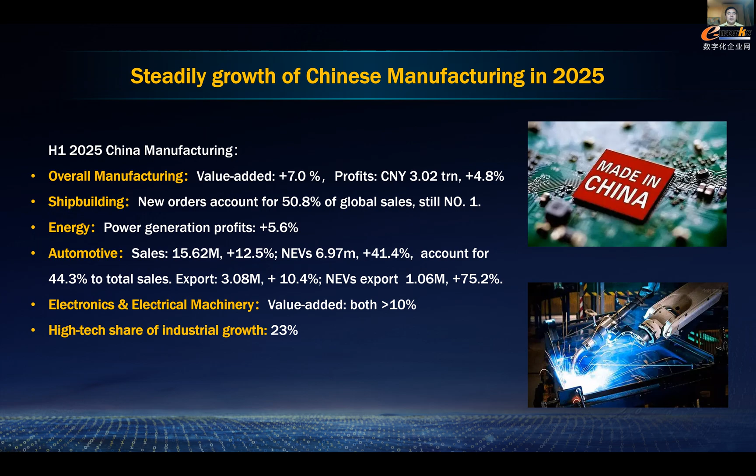Electronics and electrical machinery, the value added grew both more than 10%.

The competitive advantage of Chinese manufacturing, including the country strategy, is moving from the world factory to a global manufacturing innovation center. We have powerful government support for going from large to strong manufacturing industry. A lot of manufacturing companies in China are fast learners, good at low-cost production and export.

A lot of international companies have many manufacturing sites, R&D, and distribution centers in China, normally accounting for 10 to 30% of their global sales. China has a big domestic market.

More and more Chinese manufacturing companies are becoming international, what we normally call going overseas. We have huge and continuous investment in infrastructure, including high-speed railway, highway, and so on.

We have a complete range of industrial categories, powerful supply chain, and domestic transportation network. In China, we have abundant engineers and skilled workers. Chinese manufacturing companies are quickly promoting e-business, digital transformation, and smart manufacturing.

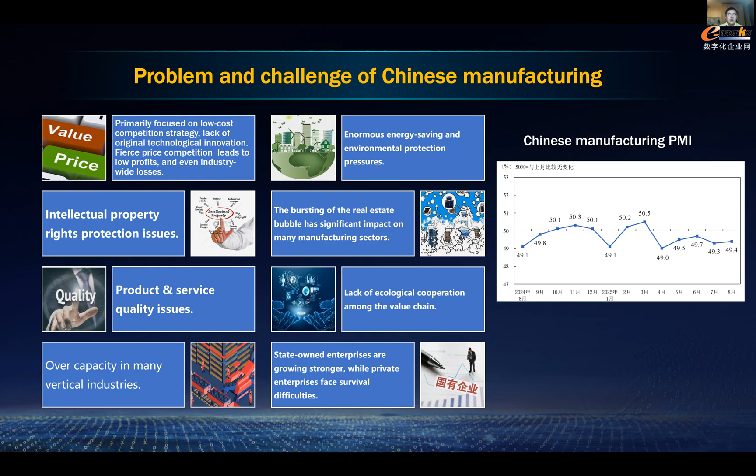In China, some big OEM companies lack ecological cooperation among the value chain. Sometimes they pay suppliers very late, sometimes even more than 1 year. In recent years, state-owned enterprises are growing stronger, while private enterprises face survival difficulties.

The megatrends of Chinese manufacturing include transformation toward high-end, intelligent, and green manufacturing; digital transformation, smart manufacturing, and AI application; globalization and improving supply chain resilience; and developing high-quality products and improving profitability.

In recent years, there are some very innovative companies in China, for example, some drone companies, some companies developing smart glasses, and commercial 3D printers. There are some very big, very fast-growing companies.

Manufacturing companies are trying to meet personalization and flexible customization, enhancing technological innovation capabilities, and increasing R&D investment. More and more companies are trying to earn money from the aftermarket, and they are trying to build ecosystems among the supply chain. ESG and decarbonization is also a hot topic in China.

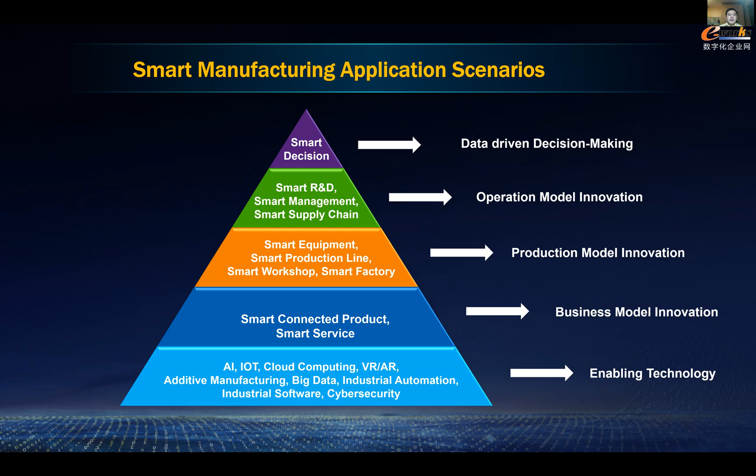In my view, there are 7 digital transformation models, including business model transformation, for example pay-per-use, and R&D model transformation, including simulation-driven design.

Production model transformation, especially realizing IT and OT convergence. Sales model transformation, including using digital sales. Service model transformation, including using AI robots to take the phone calls of customers, and using IoT and sensor data to realize predictive maintenance. Operation model transformation, using more mobile applications and even AI agents to collaborate and improve process efficiency. And finally, decision-making model transformation, using big data analysis.

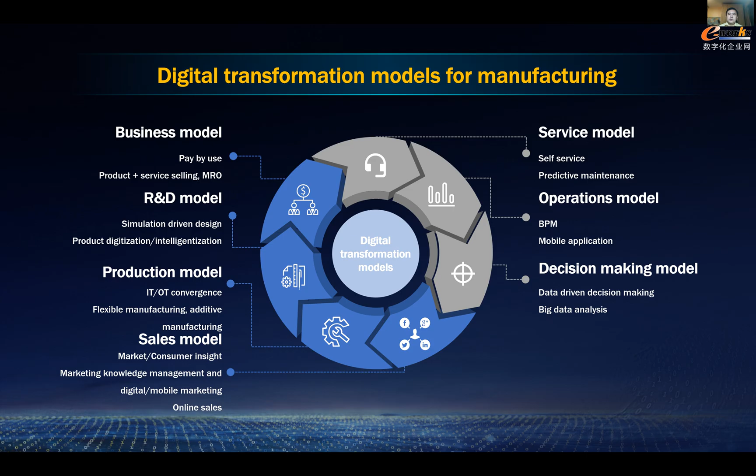To realize smart factory is the kernel of smart manufacturing. In our view, there should be 5 steps. First, lean factory. Second, connected factory.

Especially in discrete industries, many companies' workshops are still like a black box. So we need to connect the network to gather data from the machines, and then we can realize transparent factory.

To know the OEE, the efficiency, the energy consumption, and the quality ratio. The fourth step is digital factory, so we can use MES, MOM, and other software to realize digitalization of the factory. And finally, we can realize smart factory.

We should use flexible automation, machine vision, digital twin, and also APS, and use more and more AI, especially in the quality check.

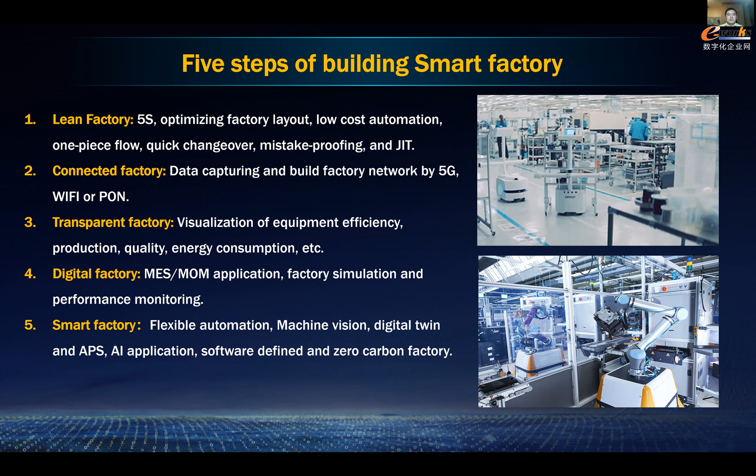So in China in these years, AI is very hot, especially, as you know, DeepSeek is hot in China now. And this innovation reduced the cost of applying AI.

So besides quality check, there are some other areas, including supply chain optimization, predictive maintenance, industrial and collaborative robotics, product development, and energy management. For example, we are talking about text to CAD, using a new way to do the 3D model.

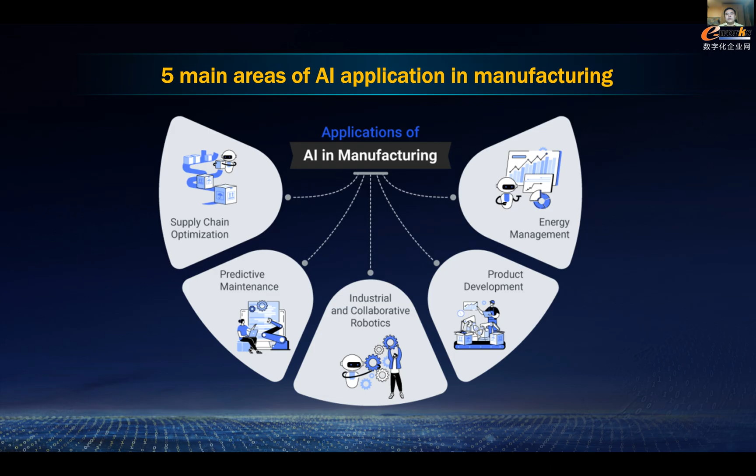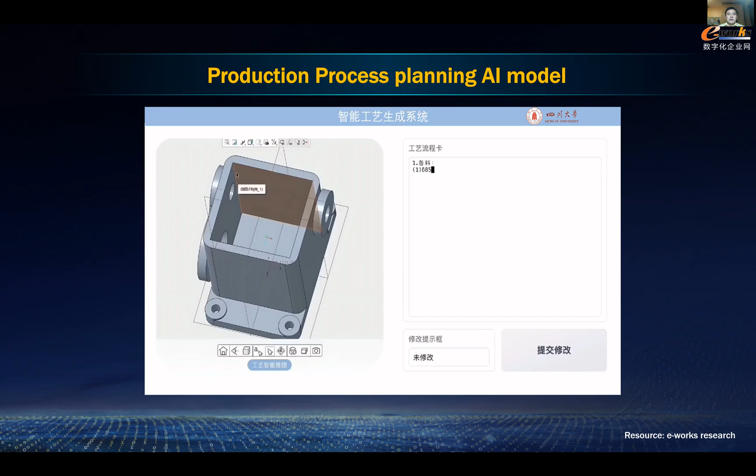Many years ago, we tried to use CAPP, computer-aided process planning software, to develop process planning. Right now, we can use AI models to develop process planning automatically and intelligently.

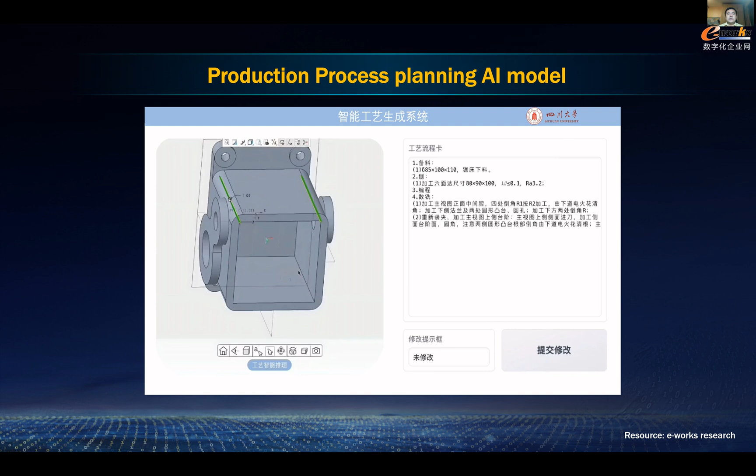For example, the first step is to recognize the production features, and then we can use an AI model, and based on the experience of process planning, we can generate new process planning for these features.

So the main value of promoting smart manufacturing in China - we have more than 10 years of history promoting smart manufacturing, and many companies are upgrading very quickly. As you know, in the lighthouse factories, Chinese manufacturing companies account for 40% of the total lighthouse factories.

In my view, the main advantages of promoting smart manufacturing include increased production efficiency, cut cost, improved quality, improved innovation capabilities, and reduced time to market of new products. Supply chain optimization, energy saving, enhanced safety and security, agility, and responsiveness to changes in the market.

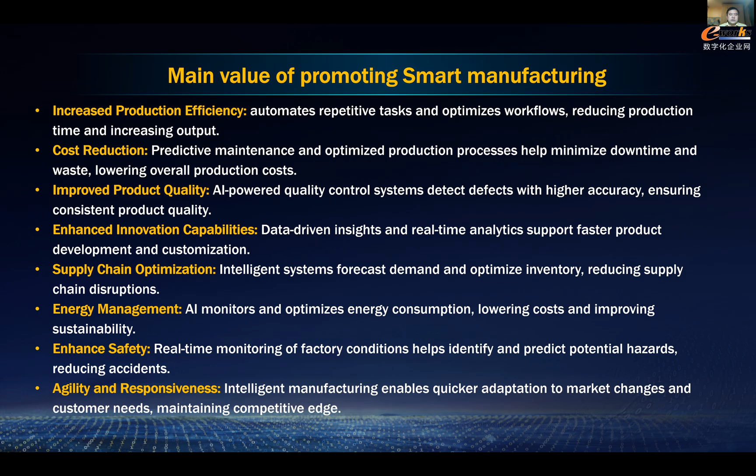So to summarize, China is on the way of transformation from the world factory to global manufacturing innovation center. Chinese manufacturers are going global at a faster pace, but still meet many challenges, especially regarding compliance.

Smart manufacturing is the main initiative of Chinese manufacturing upgrade and transformation, and has achieved very good results. AI technology is rapidly growing and has more and more application areas and case scenarios in Chinese manufacturing sectors.

As I mentioned, e-works is the smart manufacturing hub of the Chinese manufacturing area, and we have 23 years of history. So that's my presentation. Thanks for your attention.